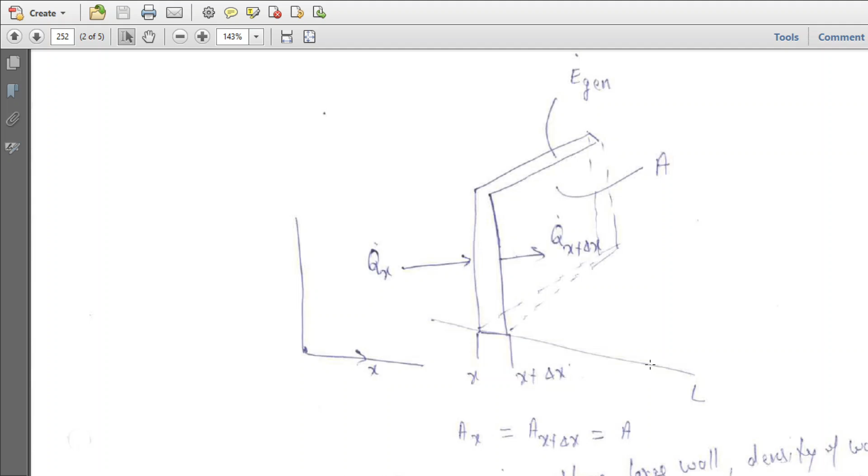Now the area of this is uniform; it is not changing with respect to the x coordinate. So the area perpendicular to the direction of heat flow is A at x plus delta x equal to A, which is constant. Energy is being generated within the material, so E dot generation is also there, and the entire thickness of the wall is L. So this is the simple statement for that.

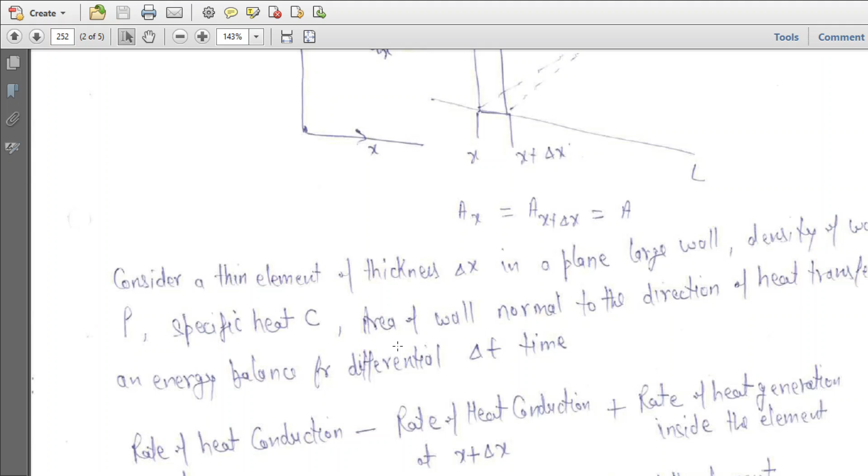Consider a thin element of delta x in a large plane wall. Density of the wall is rho, specific heat C, area of the wall normal to the direction of heat transfer A. Okay, so the energy balance for a differential delta time: rate of heat conduction at x minus rate of heat conduction at x plus delta x plus rate of heat generation inside the element equals rate of change of energy content of the element.

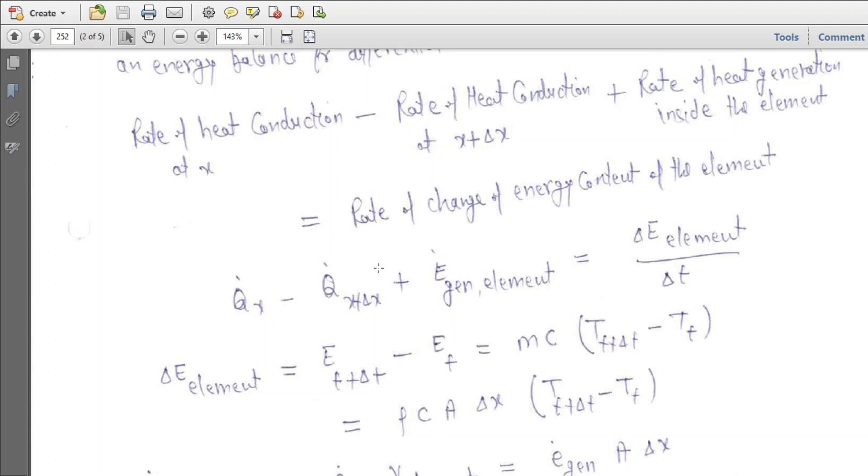So q dot x minus q dot x plus delta x plus E dot generation of the element equals delta E element upon delta t. So delta E of the element is given by rho C A delta x times T at t plus delta t minus T at t. So A into delta x gives you the volume of the differential element. So E dot generation is given by e dot generation A delta x.

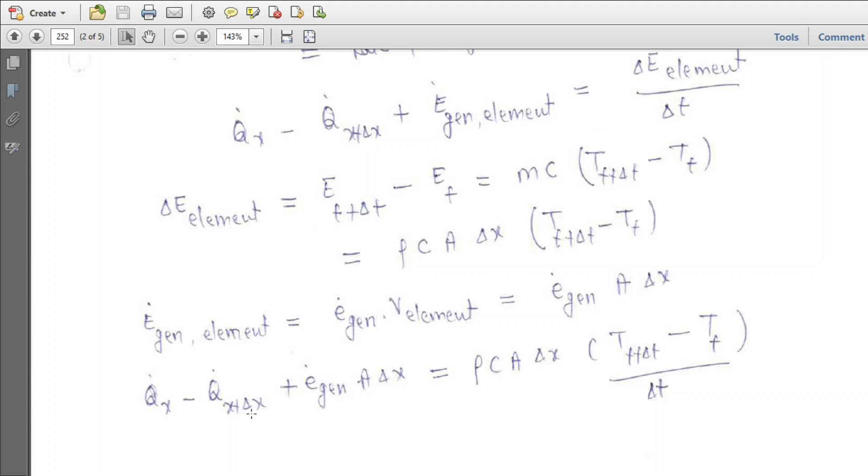Substitute all of them in the governing equation. There we have q x minus q x plus delta x plus e dot generation A delta x equals rho C A delta x times T at time t plus delta t minus T at time t upon delta t.

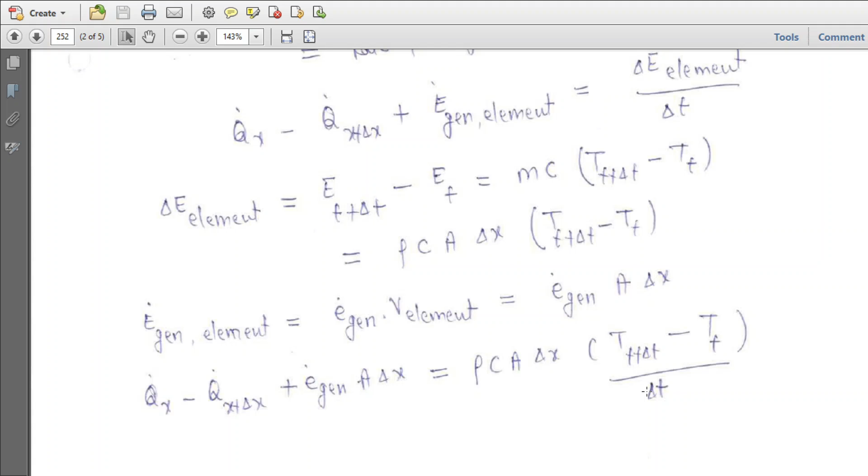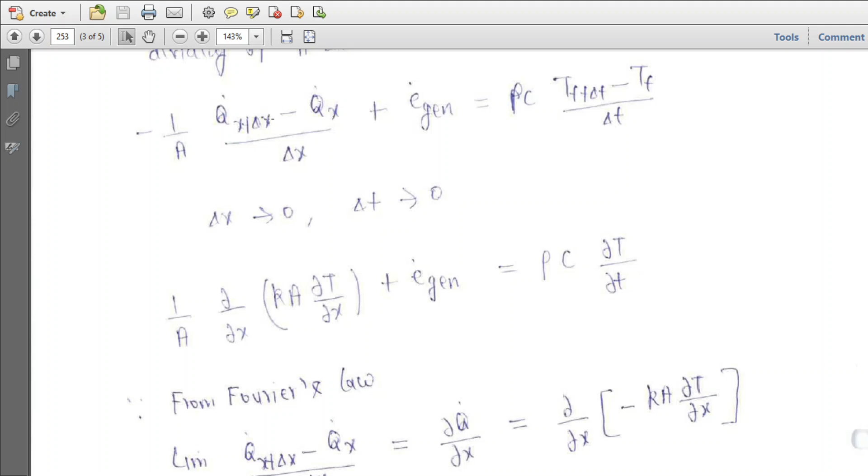So dividing this equation by A delta x and taking the limit delta x tends to 0, delta t tends to 0, you will end up with 1 upon A del upon del x of kA del T upon del x plus e dot generation equal to rho C del T upon del t, and we have taken Fourier's law of heat conduction also there, that Q equals minus kA del T upon del x, in this particular equation.

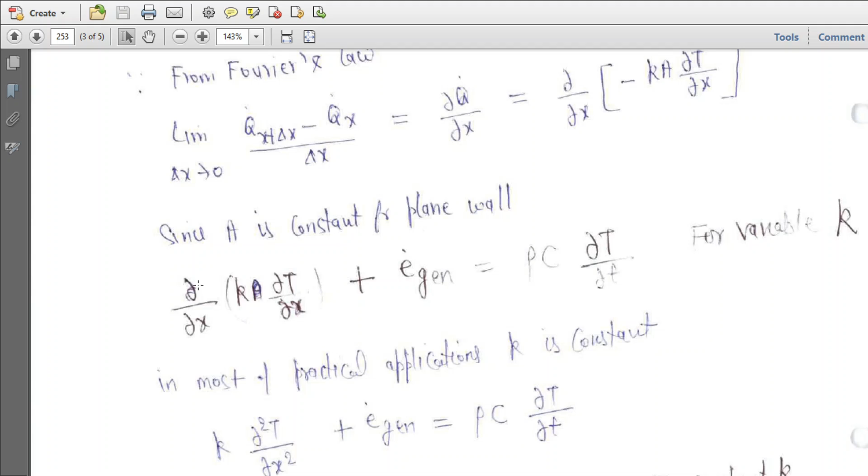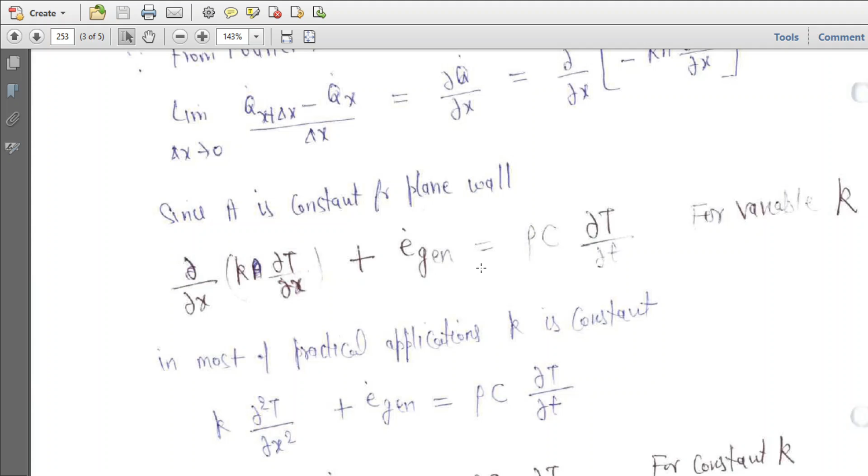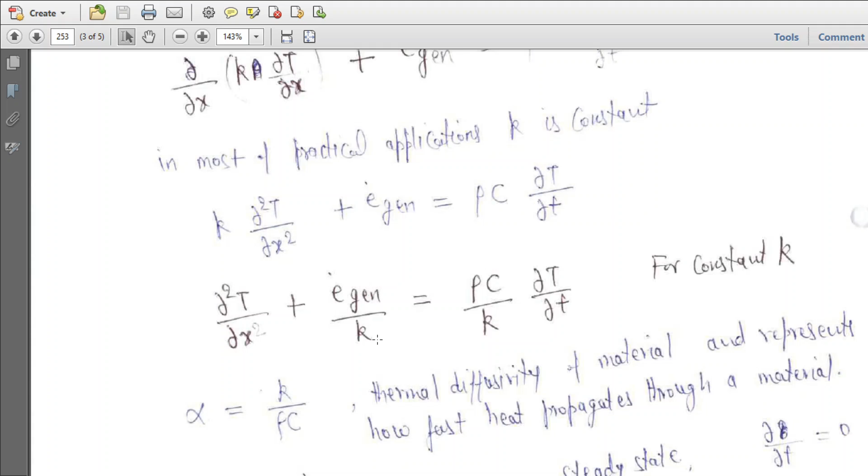Since A is constant for a plane wall, you have del upon del x of k del T upon del x plus e dot generation equal to rho C del T upon del t for variable conductivity. In most practical applications, thermal conductivity is constant, so k del squared T upon del x squared plus e dot generation equals rho C del T upon del t. So for constant thermal conductivity we get the relationship with alpha. Alpha is the thermal diffusivity of the material and represents how fast heat propagates through a material.

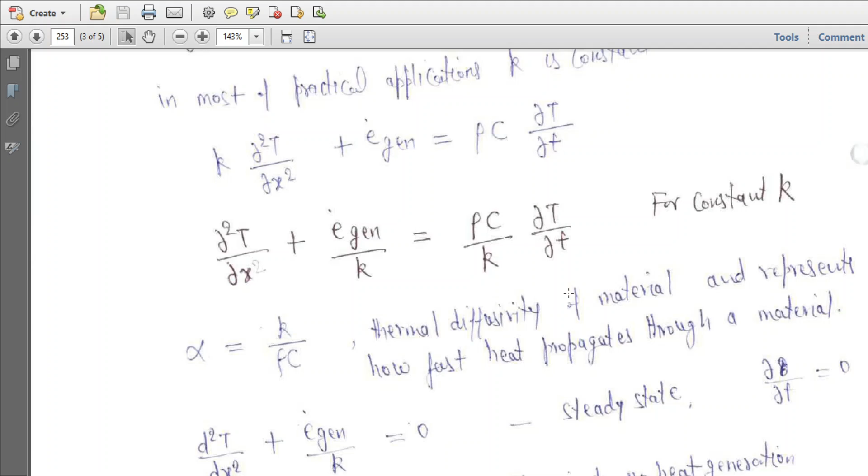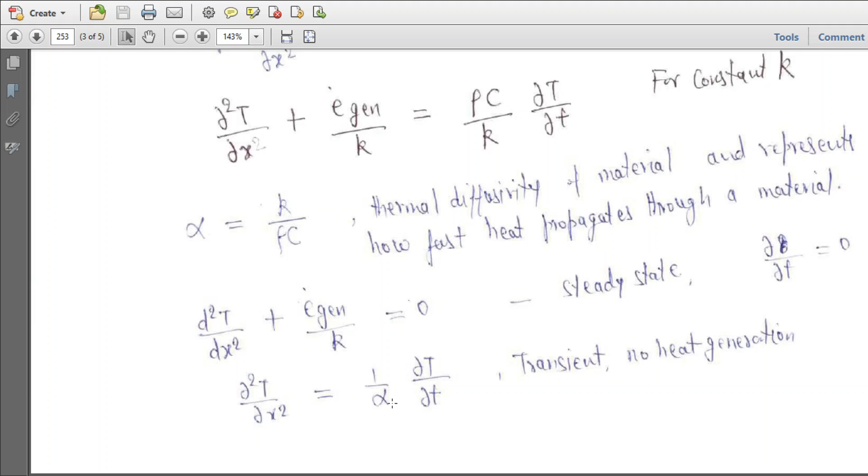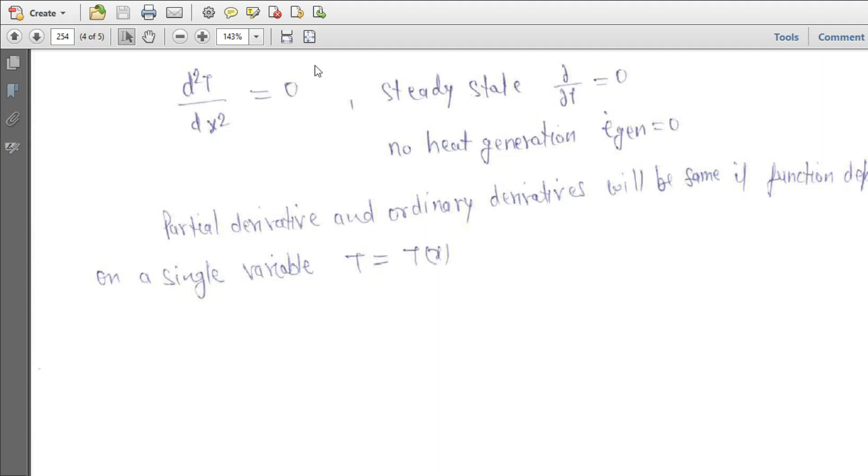For steady state operation, you will get d squared T upon dx squared plus e dot generation upon k equal to 0. For unsteady state with no heat generation, del squared T upon del x squared equals 1 upon alpha del T upon del t. For steady state with no heat generation, you will end up with d squared T upon dx squared equal to 0. So this is a second order differential equation, which always needs two boundary conditions to solve.